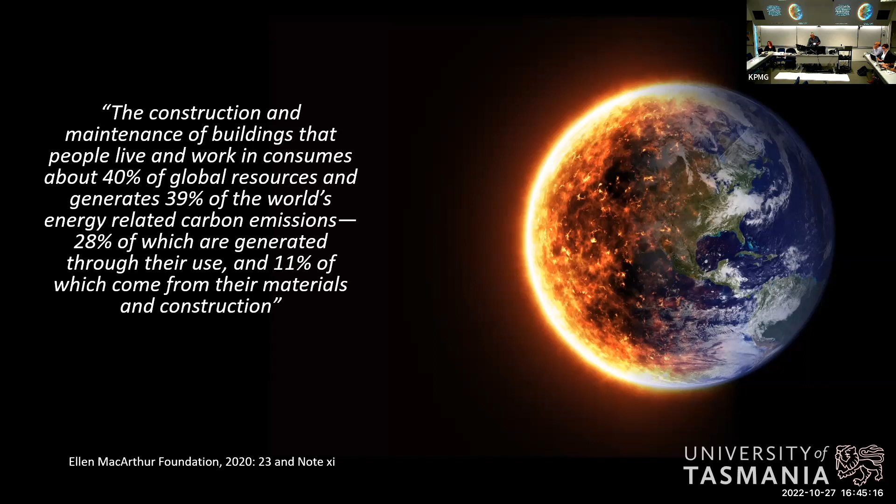Okay. This presentation focuses on the concept of the circular economy as a response to the second impact building construction is having on the environment. That's the unsustainable resource side of consumption. And they work off what they call principles in this. I'm sure they'll develop policies and practices and processes. So the circular economy principles, I think most people would know, are eliminate waste and pollution, keep products and materials in use, and regenerate natural systems.

For example, the concrete and glass in most buildings at least is primarily composed of one thing, sand. A 2014 report by the United Nations Environment Programme warned that sand is being extracted at a rate far greater than its renewal and is having a major impact on rivers, on deltas and coastal and marine ecosystems. For instance, Asia's largest winter destination for migratory birds is on the Poyang Lake in China, which is rapidly being destroyed. So there just won't be a place for migratory birds very soon.

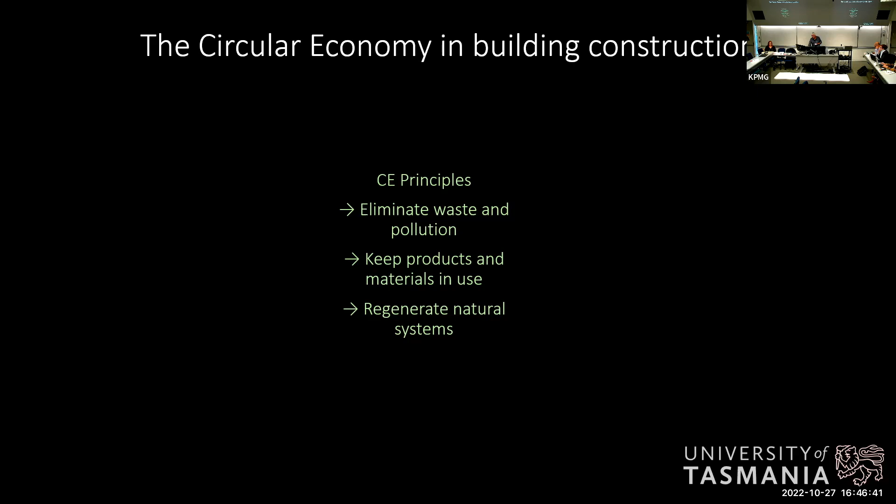Now, there's two views of these CE principles. It's a new paradigm that will push the frontiers of environmental sustainability. And there's a massive, sophisticated literature and research relating to this new paradigm. It focuses on the material and technical processes of change towards circular economy. There's a book to be published next year by Ghosh and colleagues that's 90 chapters long on the life cycle stages of the Indian construction industry, covering project design, material manufacture, construction operation, supply chain collaboration, regulation, the economic and political context, and all the end-of-life issues.

Now, counter to that is the position that it's all an overhyped concept dominated by a business-focused narrative of competitive advantage. And we heard comments along that line previously from Darren. And current research in building construction is dominated by this sort of top-down, technological, slow, piecemeal approach that is not going to do the job. Now, there's prospects for alternative business models that have been mooted through all of this, but what is not at their centre are the social relations of the production of construction, the workforce issues, and in fact, the just transition issues.

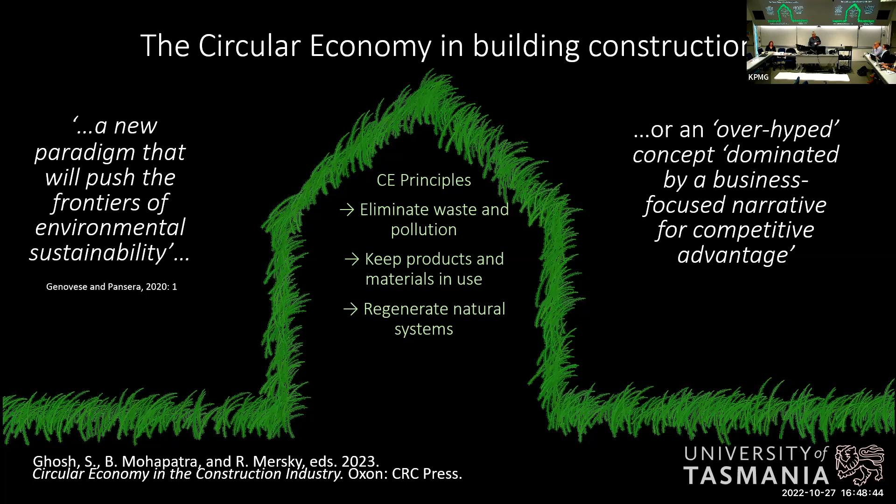And so whatever view is taken, whether the cynical view or the idealistic view, it doesn't actually really matter, does it? Because the more pressing problem is how to implement these CEPs and who's going to do it in a timely manner. So we argue that a just transition to a circular economy is crucial for two interlinked reasons. First, to defend the future of decent work, and second, to enable unions and the broader climate movement to forge a sufficiently powerful alliance to force governments and employers to comprehensively implement the circular economy in construction.

This is a quote from the Victorian Trades Hall Council that wrote a report about a just transition. It sums up what's at stake. Without workers and unions playing this leading role, we risk either climate and economic breakdown or a transformation that's authoritarian, gives priority to the interests of capital over workers, and replicates the economic, social, and political injustices that we find ourselves in today.

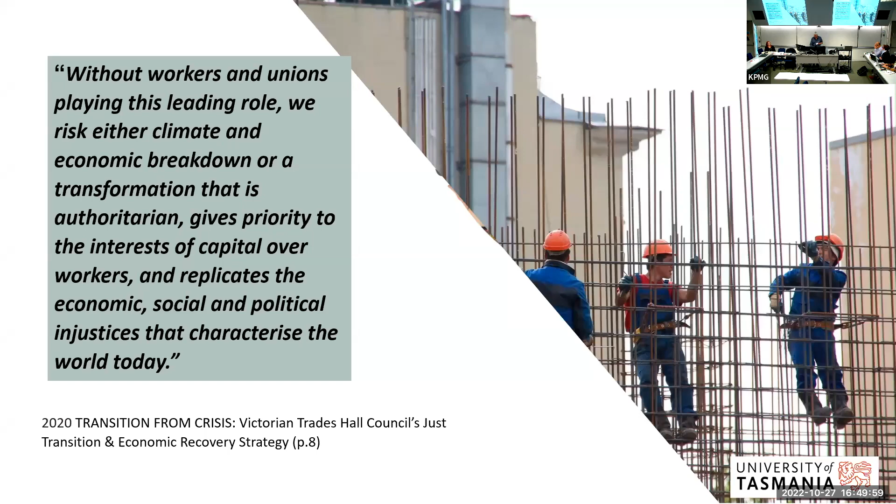Now, the study is very much a preliminary investigation, scoping the sector. What is the construction sector? And what is its workforce? In the next stage, our research will be scoping the conditions of possibility for a just transition in the Australian housing construction market.

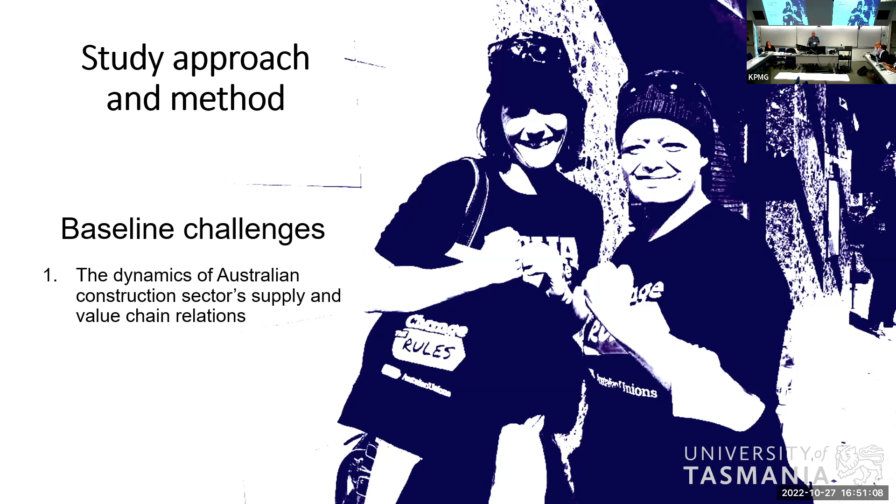Now, there's some baseline challenges here. Analysing the building construction industry and its transition to a circular economy is very complex. It's distinguished from studies of the renewable energy sector in a number of ways. Its outputs, for example: the energy sector, renewable or not, is structured to generate fairly regular output, either during the day or for 24 hours a day. The building construction sector, in contrast, operates iteratively, one output after another, one building after another, through a complex supply chain.

Is significantly increasing. A recent industry report from the US predicts the modular construction market to balloon in value to $110 billion by 2025. Another report says many major international builders plan to cut down their on-site construction costs to 25% of their costs by 2025. So there's a shift from what you would expect the construction of a building to be, the on-site thing, back to manufacturing.

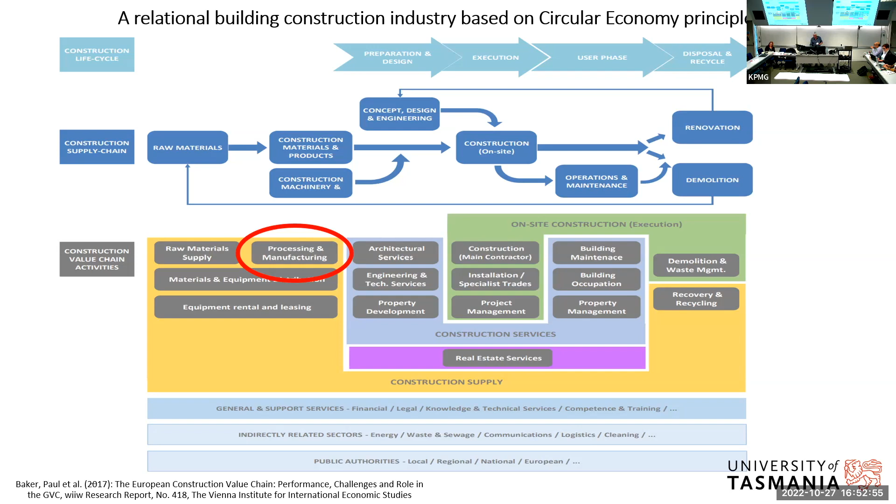Subcontracting building work is common, poorly unionised, and frequently uses sham arrangements to put construction workers on lower wages and conditions while they're working alongside regular wage workers. There's also a highly unionised and militant workforce concentrated on nearly all major building sites, the CFMEU. However, the building unions in Australia only cover 14% of the workforce.

Another challenge is data. It's a technical challenge of cross-analysing occupational categories in the Australian Bureau of Statistics with industry categories. Because, for example, labour hire companies are considered to be part of the service industry. But 2 or 3 of the largest construction companies in Australia listed on the stock market employ the majority of their workforce through labour hire companies, some of which they partly own. And so trying to analyse the workforce through the ABS has been a challenge.

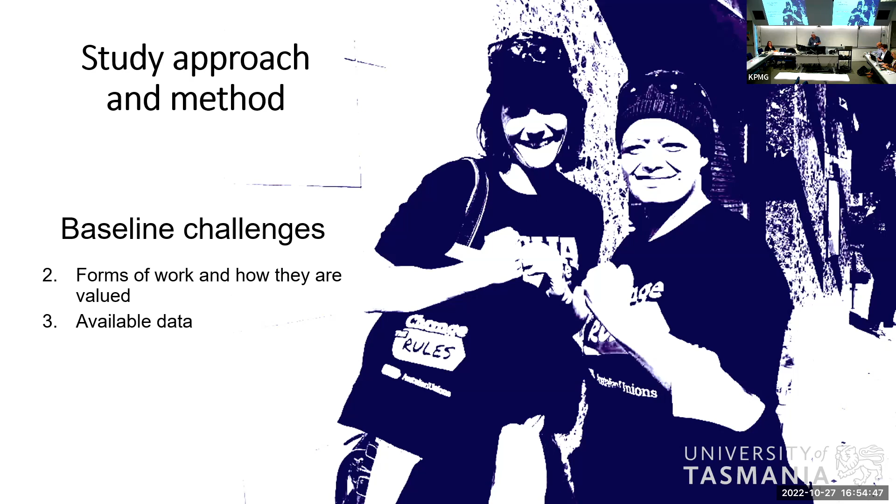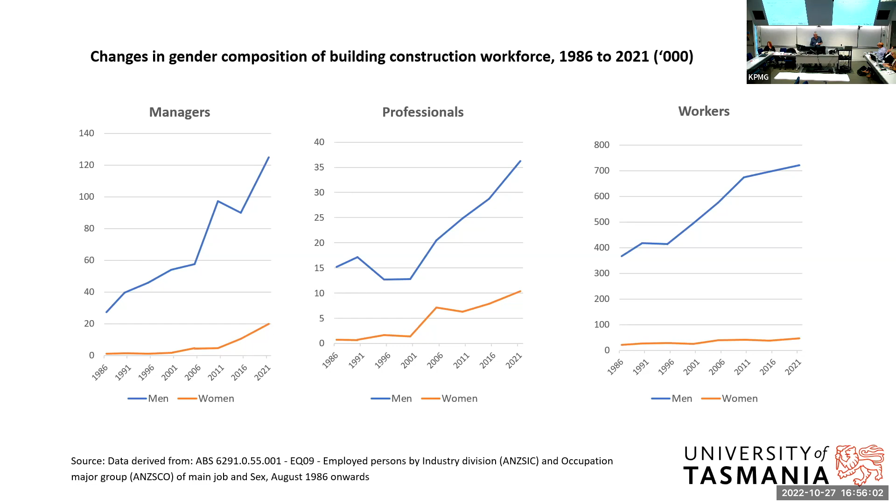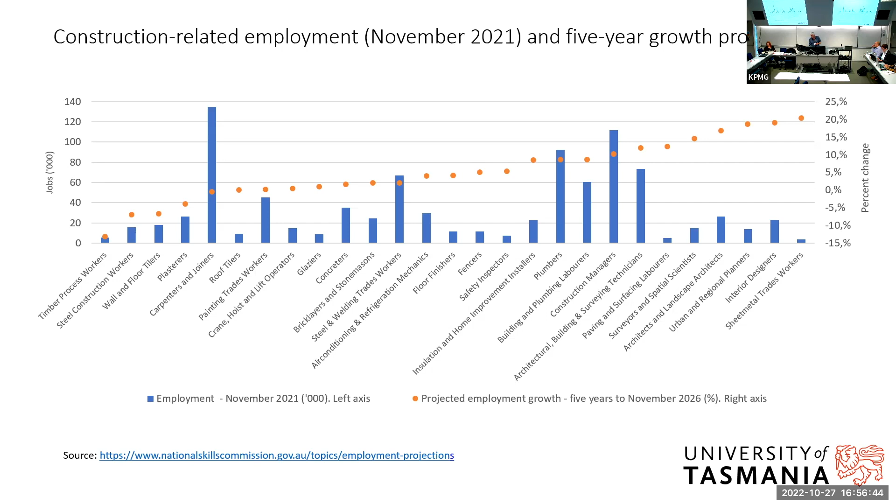The employers and the government are projecting, here's a projection of expected demand for labour in the next 5 years. They do this every 6 months or so. There's still very little acknowledgement there of the move towards manufacturing, up the supply chain, or the need for a circular economy in the sector. You can see the sheet metal workers at the end there, there's going to be a tiny increase, but overall, there's no real recognition.

The implications, and I'll finish on this, is we argue a just transition, for it to be ecologically sustainable, will require the leadership of the trade union and climate justice movement, which faces a difficult challenge in the construction industry. The rapid integration of the modular market is going to throw up challenges and opportunities. With the digital platform coming through, it could help, theoretically, integrating circular economy principles throughout the

construction chain. On the other hand, the further disruption of employment relations and jobs, and introducing CE practices on top of these other changes, is likely to increase tensions in the union movement between the manufacturing unions and the construction unions, with the offshoring issues involved in manufacturing and modular construction. It's going to throw up 'Australian jobs for Australian work.' And so it's going to foster a national feeling that, on its right wing, has a racist edge.

And the question of gender equity is hardly even being raised enough in the construction industry. And if there's going to be a social movement union approach to fighting for a just transition, gender equity in the construction industry is an absolute issue that they need to deal with.

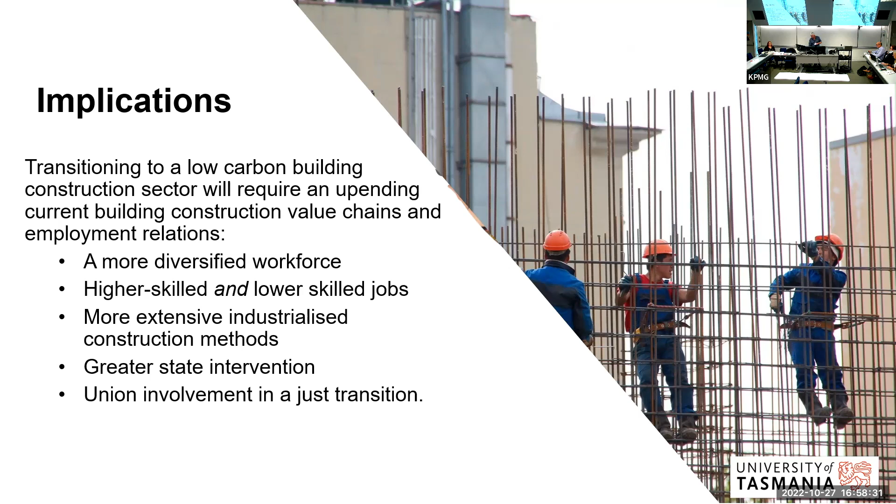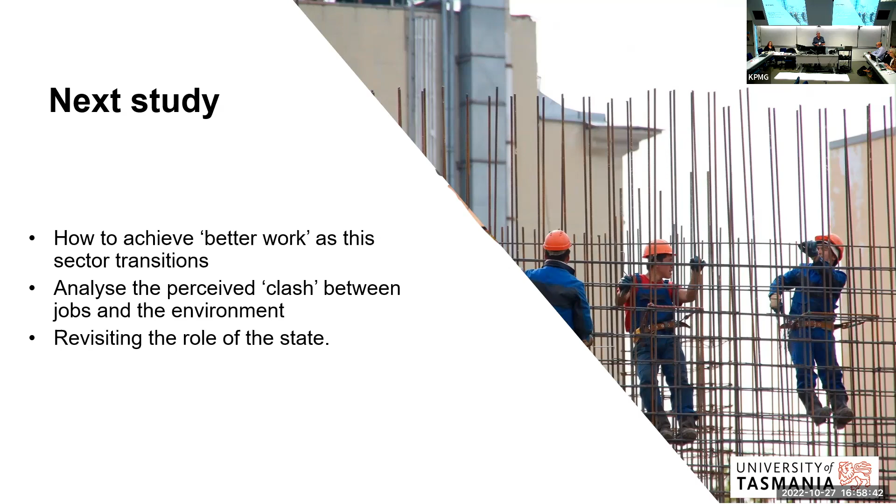Our next study is to flesh this out, bring it into a political economy analysis, to talk about the issues of the state and to bring it all together. So I'll leave it there.